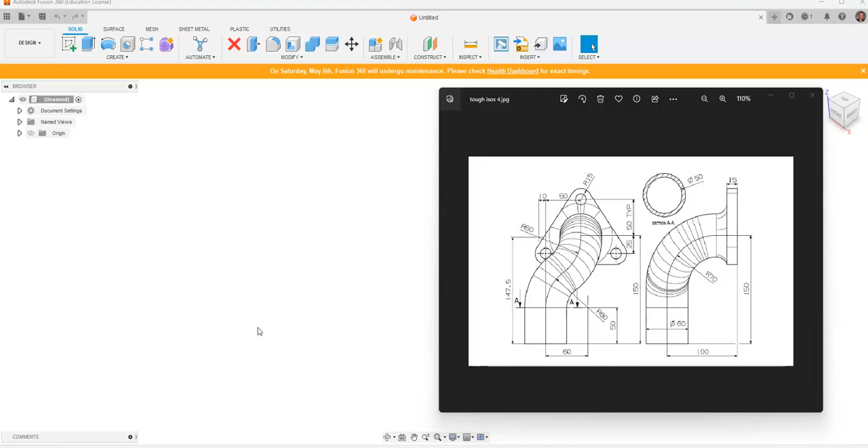For Tough ISOs number 4, we have this bendy, windy tube shape. The surface that we will be sweeping and creating a tube out of is right up here at the top. You have two concentric circles. In our front view, we have a shape that comes up and bends to the right and then bends back left. On the side view, you can see this vertical line that gets a fillet and comes around to the side, and we have this triangular plate that is perfectly 90-degree angle aligned to where our tube becomes at a 90-degree angle here.

Within Fusion, we have two different sketches we're going to do on two different planes, and we'll also be messing and learning with the surface menu within this part creation video.

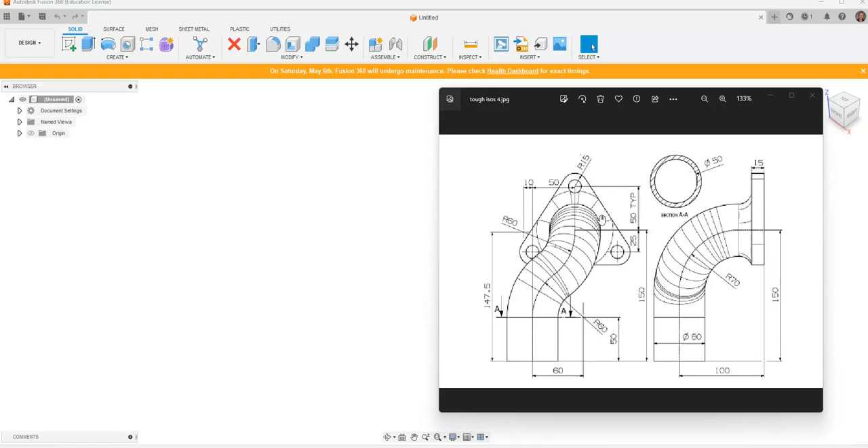So what we'll do is create this object in metric, and for the sake of the video, we're going to create this in millimeters. So we're going to go up to Document Settings, change our unit type to millimeters, and say OK.

I want to take a look at our origin menu. Just turn on the origin here. I'm going to grab a hold of Create Sketch, and we are going to start out on the XZ plane.

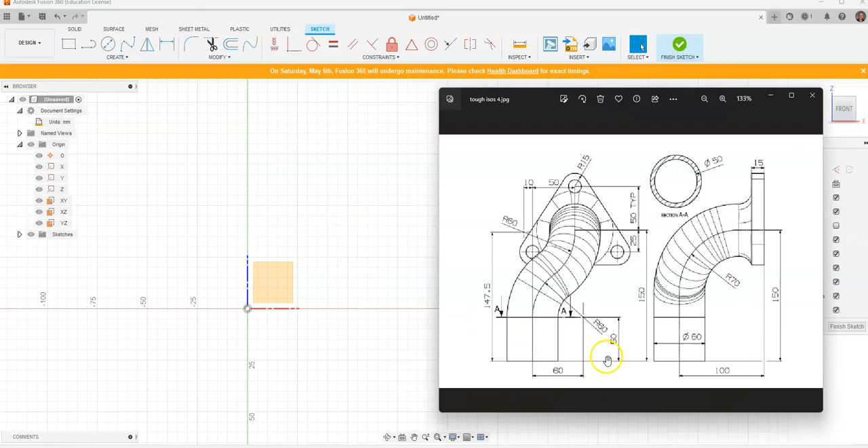To start this sketch, when we take a look at this object, we want to draw a line to start from the origin up a distance of 50. We will be using construction lines in doing this.

So I'm going to go back to our menu, turn on construction, grab a hold of the line command, and I'm going to draw up a distance of 50. I'm going to hit enter.

Now for our next step, we want to try to find this point over here on the right that is the center point of the radius of this curve, and we're going to come over 60 and up 50. So we're going to go up to Create, then down to Point.

Now I just want to place a point over here. I want to grab a hold of Dimension. I'm going to click here, go down, and place a distance of 60. We want to go up a distance of 50 from our point to our origin. We will drag over and put a distance of 50.

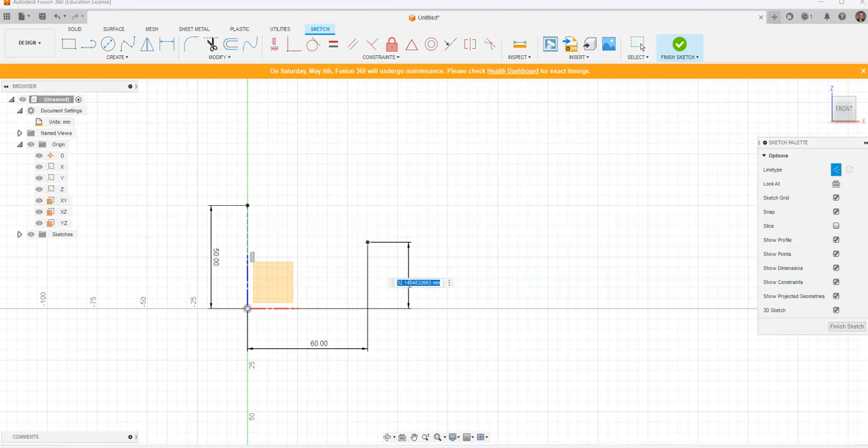If we go back to our object, we will see that we have an arc that is a radius of 60. The diameter then would be 120. We'll go back up to Circle, click on our point, and as we drag out, we'll put a distance of 120. We're going to hit Enter.

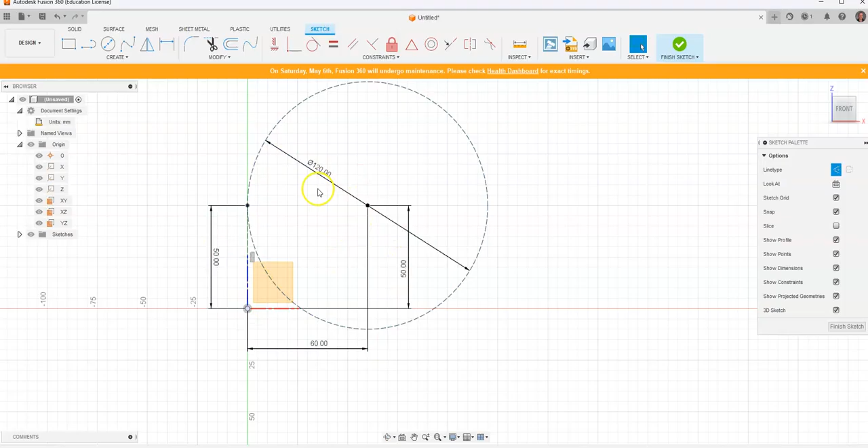Now that creates a perfectly tangent constraint right here, since this is 50 and this is 50. It's very good that we have 60 down here for half the diameter, which creates a nice perfect tangent constraint right in here.

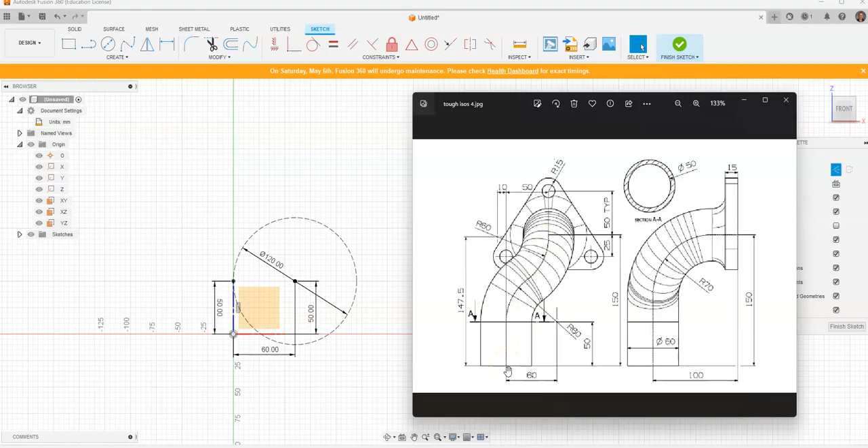Now when we go back and take a look at the object, the next thing we need to do is find the center point for this radius of 60 arc that comes in tangent here. This will allow us to do a little geometric construction, and I want to create a point that starts down here at the origin and is all the way up here at the top, and I can see the height up to here being 150 plus 50.

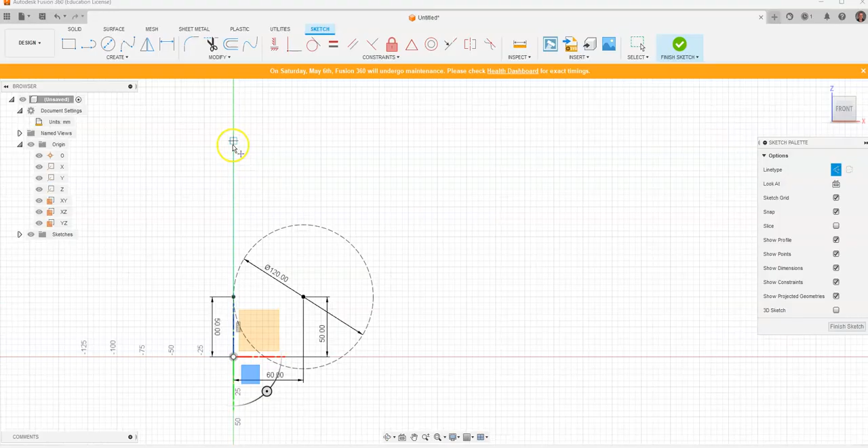So let's grab a hold of the point command, and I'm not going to click when I go to the origin. If you see this little curve down here, I want to get out of 3D Sketch for now. I don't want to click when I go to the origin, but I do want to drag straight up off of it, and you can see that dotted line show up in vertical alignment with the origin. I'm going to click up here, grab a hold of Dimension, and click down here.

I'm going to drag over a distance of 200. I want to make sure I'm not in 3D Sketch again, just to make sure of that. So now that we've gone all the way up here to the top, I'm right up here in this area, and eventually we'll have to create a vertical line that comes straight down tangent here. So I want to come over to the right a distance of 50.

I'm going to go to Create, then Point, and instead of clicking here, I'm going to drag over and have vertical alignment with it, horizontal alignment with it. I want to click on this point, go back to this point, and come up a distance of 50. I'm going to hit Enter.

We also need a point to the left that is 10 from here. I'm going to drag over, Dimension, here to here, 10. Just a nice distance of 10.

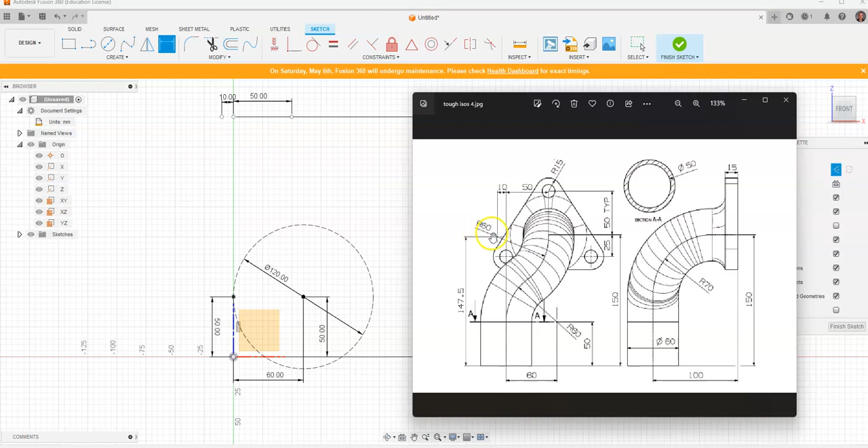10 over to here, and we need a point down from here. Actually, what I need to do is take this one off of here. Let's take this dimension off. One thing I want to do is take this 10 dimension off of here because I placed it over to the side. I'm just going to drag this point down here.

What we need is this point, where I made the mistake, is this dimension right here, and I'll need this point to be 10 over. That's all I really need.

So from here to here, what I can do is say from here to here is a distance of 10. So let's go ahead and put 10 back in down here, and I'm going to go to Dimension again, going from here down to the origin. I'm going to drag over, 147.5.

And hit Enter. We're going to go up to Circle. We're going to go to that point. We're going to put a diameter of 120.

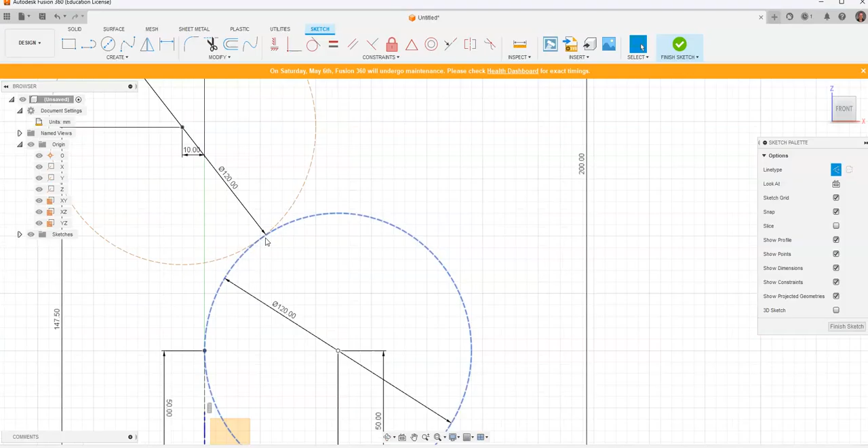Now, one thing I've noticed is that when you create this circle, notice how this stays an orange color and this is a black color. If I zoom in on these two arcs, they do not touch. They're just barely not touching.

So in order to make this work, I'm going to delete away this 120 dimension, and I'm going to grab a hold of the tangent constraint. I'm going to click on these two circles, then our tangent. Now while I'm here, if I click tangent and say this circle be tangent to this line, I'm going to get an error over here because it's trying to say these things are already tangent, which is good.

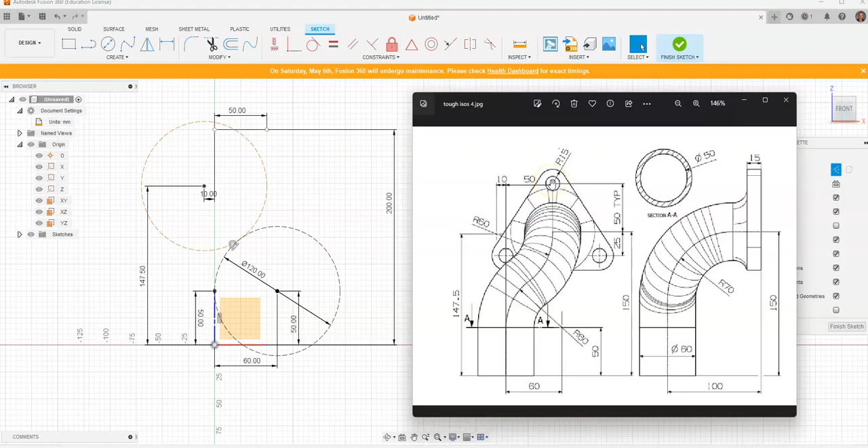Our next step is we want to create a vertical line that goes from the center of this hole straight down. We're going to go to the line command. We're going to start up here at our point. We're going to go straight down.

And if I zoom in, you can see there's a tangent constraint that shows up. Let's click tangent, right click, OK. Trim is what we will do next.

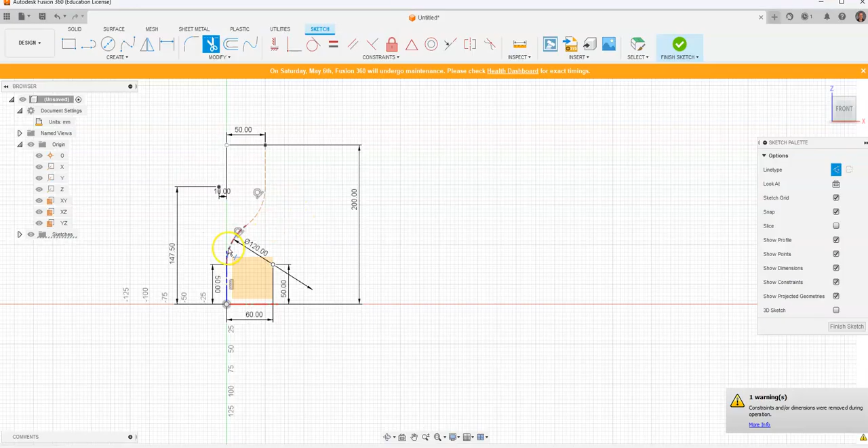I want to trim away the outside here. I'm going to trim away the excess over here on the side. And we now have for ourselves our two curves, a vertical line and a vertical line.

If we look back, if you just look at the hand over here on the picture, we went up, we've created a curve, it's tangent, another curve is tangent. We have ourselves a line that goes straight up.

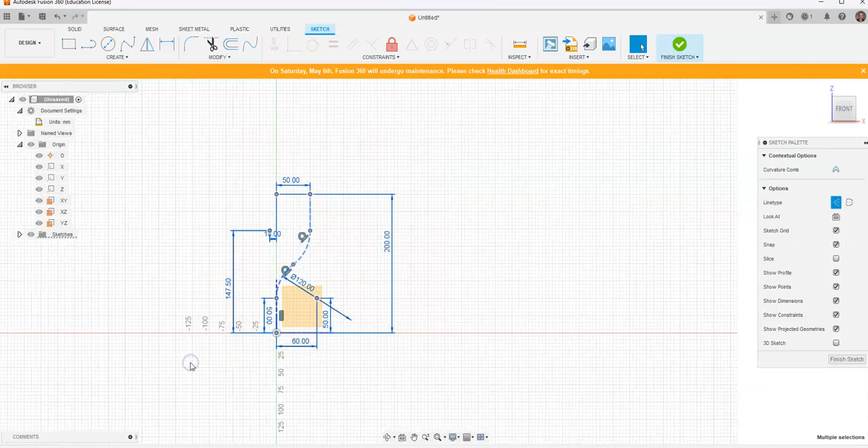When we go back to our sketch menu, I want to highlight all of our construction lines and get rid of construction. These now will be object lines. We're going to go to Finish Sketch. And as we go back, I can see now our lines.

Now, the blue lines right here, what that means is they might not be perfectly formed, but that's not going to be too big of a problem for us later.

Our next step is, from the origin right here, we came over a distance of 50, and you'll see this right here is where that vertical line becomes tangent. What we need is to create for ourselves a work plane that comes over a distance of 50, where we can actually start sketching this arc right here.

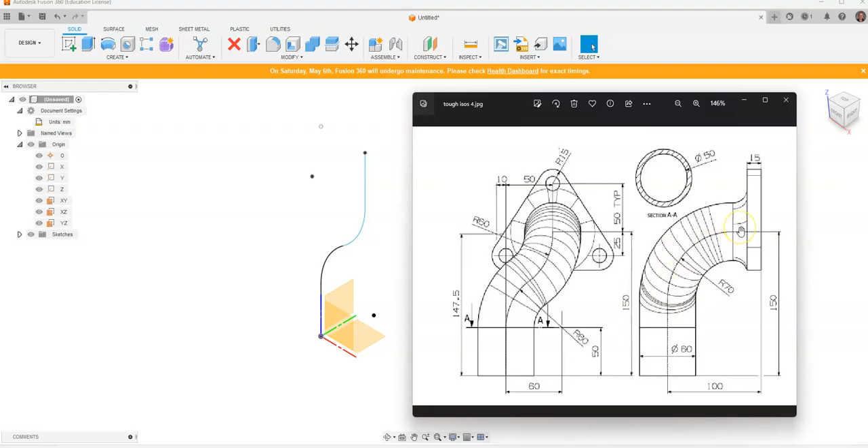You see a vertical line that goes up, you see the arc, you see the horizontal line up here. We need to create for ourselves a new offset plane. So we're going to go up to construct, and we will click on the YZ plane.

We're going to drag over a distance of 50. We're going to create a new sketch on our new plane.

Next we need to find where this point over here is going to be. We see we go over 100 and up 150, but I want to subtract 15 from 100. The horizontal distance we will go over will be 85, and we'll go up a distance of 150.

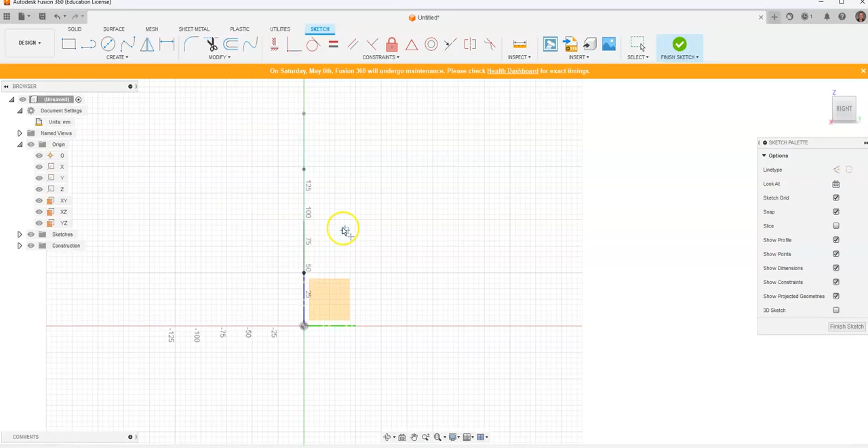So we're going to go down to point again, and I'm just going to click anywhere over here and grab a hold of dimension. From the origin to the point, we're going to go straight over 85 and hit enter.

Let's go back and take a look at our image. We're going to go up a distance of 150 for that point. We're going to go to point, origin, over 150, and enter.

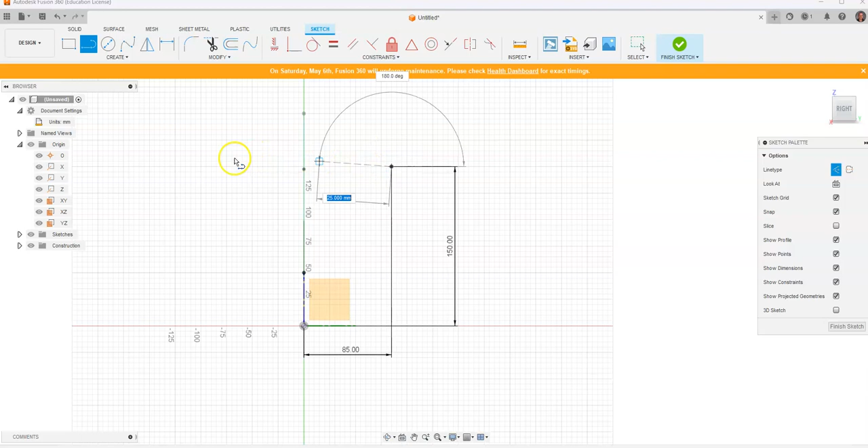I want to go to construction line, and we're going to grab a hold of the line command. We're going to draw for ourselves a line straight over. Doesn't really matter the distance right now, I didn't put in a specific distance.

We're going to go to the line command again, come down here to the bottom. We're going to go straight up.

Now we need an arc that is a radius of 70 right in here. Arc, line, 70. And hit enter. And this right here is exactly what we need.

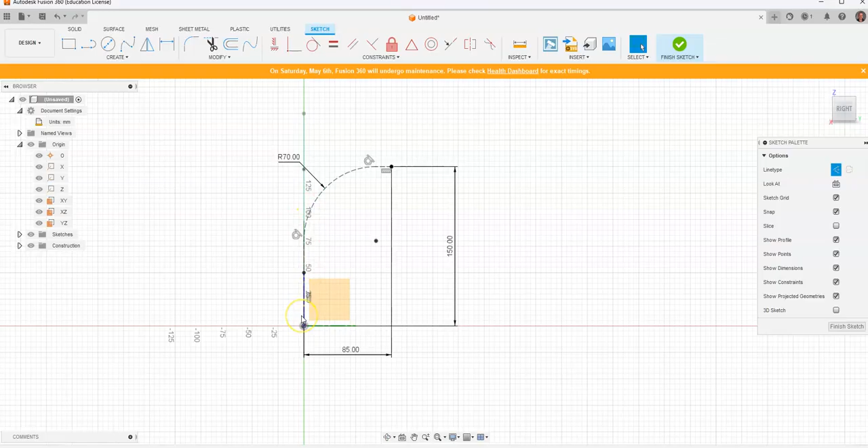We need a vertical line that comes up. We need a tangency here, which we have at this tangent point over here. We have the tangent constraint. It has a radius of 70. It becomes horizontal here, and we have tangent.

So we're going to go ahead and highlight everything and turn it into an object line. Highlight everything, take away construction, finish your sketch, go up to the house command. You'll see now we have for ourselves two different curves on two different planes.

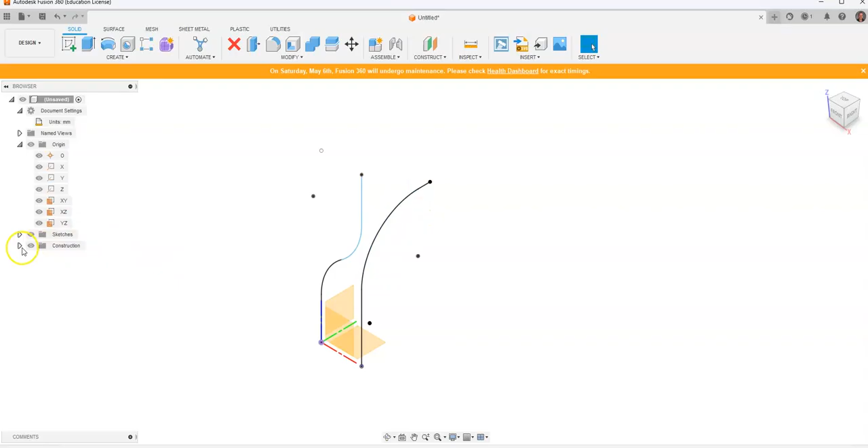This curve is resting on this plane. This curve over here is resting on this offset construction plane that's right here. Now this is where things get a little bit tricky. We're trying to get this curve and this curve to be on a similar plane together.

So this is where we're going to start using the surface menu. And what we'll need is this line right here, just kind of to become a thin surface. There's no profile for us to extrude, there's no closed profile where we can have surface area. We just need this line to become a surface.

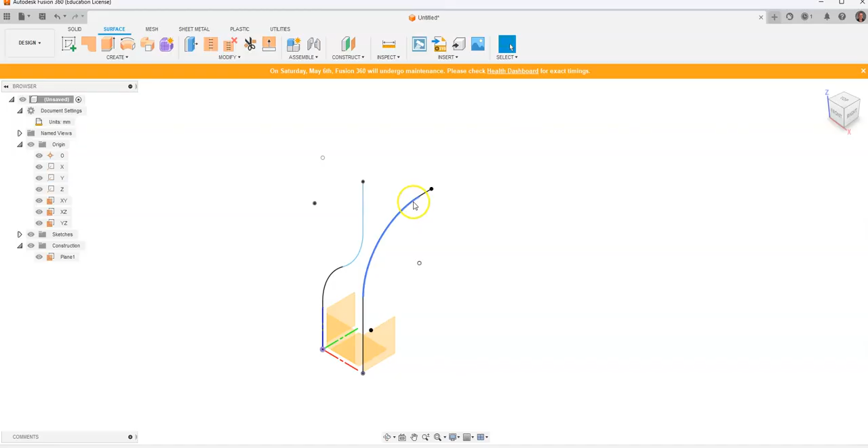And we're going to go up to extrude up here, and we click on this curved line. We're going to go over to direction and go to symmetrical, and I'm just going to drag straight out. Doesn't matter the distance, I just want to drag straight out.

Say OK. Let's go up to create sketch. We want to click on the top flat surface up here and click and go to your house button.

Now we're going to try to project the geometry of this curve here onto this object. Now this is kind of difficult to do in a way because it's not like we have a flat plane. It's not like we're projecting from one flat plane to the same kind of perpendicular, or excuse me, a parallel plane that's just a few feet away from it. This is on a curved surface.

So we need to do a different type of projecting, and in the surface menu you have a different kind of projecting. Let's go down to project. We're going to go to project to surface, and it's going to ask us for faces first. Flat surface, curved surface, other flat surface. We have 3 faces selected.

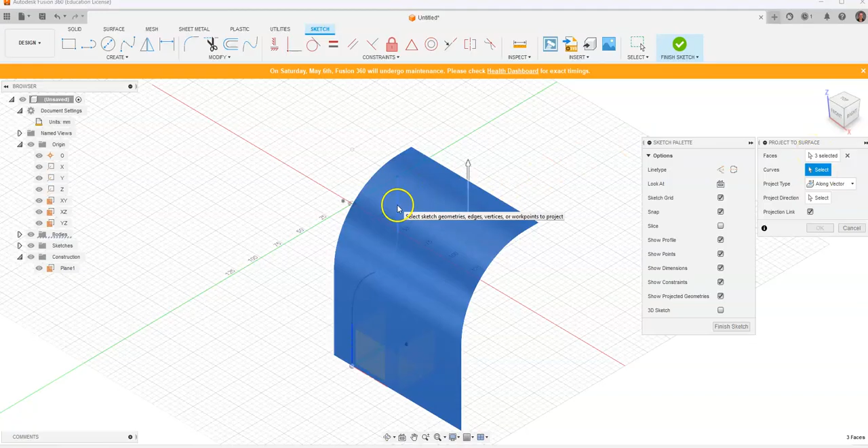We're going to go to curves, and we're going to select every line that we just created. Every line here, there should be 4 separate lines. It'll ask for project type, make sure we're in along vector.

It's going to ask us for project direction. Now if you look up at our view cube, we have Z and we have X. Z is vertical here, X is along the bottom. We need this to go in the Y direction.

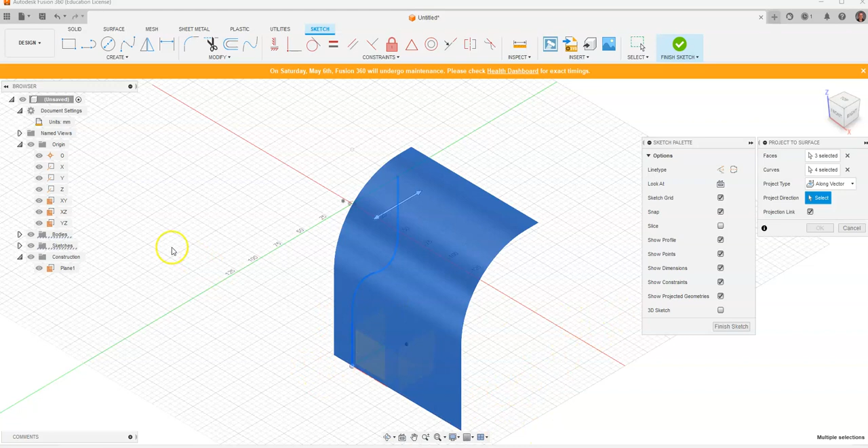So we'll go over to the origin and click on Y. You can see this red curvature is now sitting here. We've taken this curve and projected it onto this plane, laying it onto the plane, kind of like it was a wet piece of spaghetti. We'll go ahead and say OK.

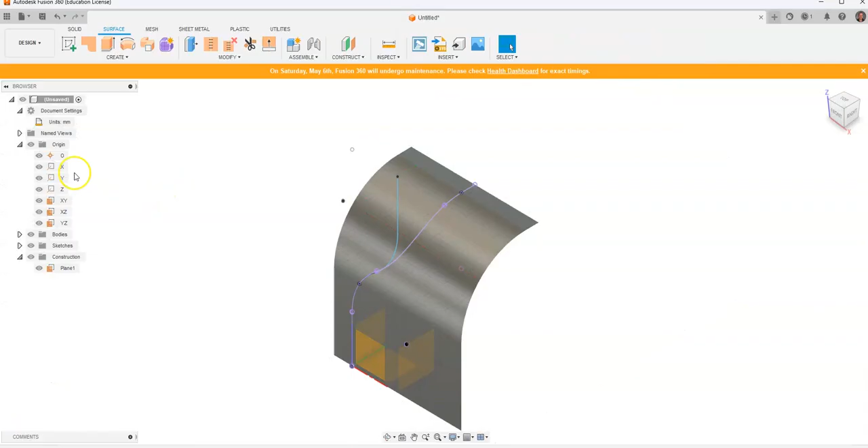You can see we have this purple line here that's now a projected line. We're going to go to Finish Sketch. We'll come over to the Origin menu and turn off the Origin, turn off the visibility of that body, and turn off the visibility of our offset plane.

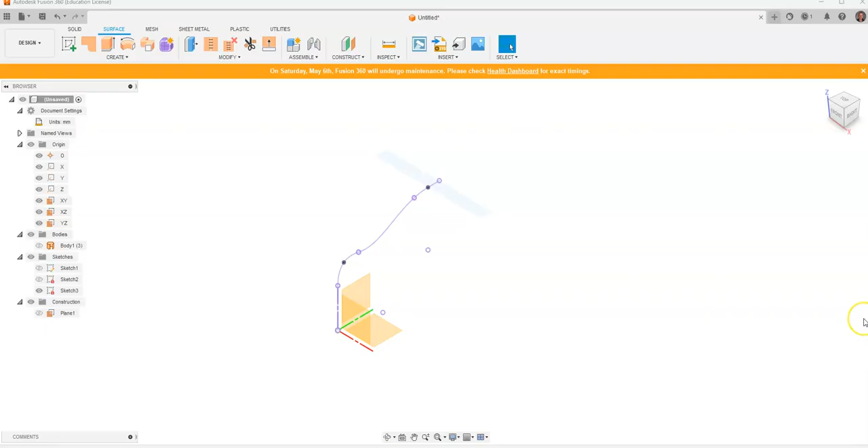We're going to go to Sketches, and the only visible line that I want is just this line right here. Now we can turn back on Origin just to take a look, because we are going to need to sketch our 2 concentric circles, since these 2 circles up here are what's going to follow this path we just created, which we can see in purple.

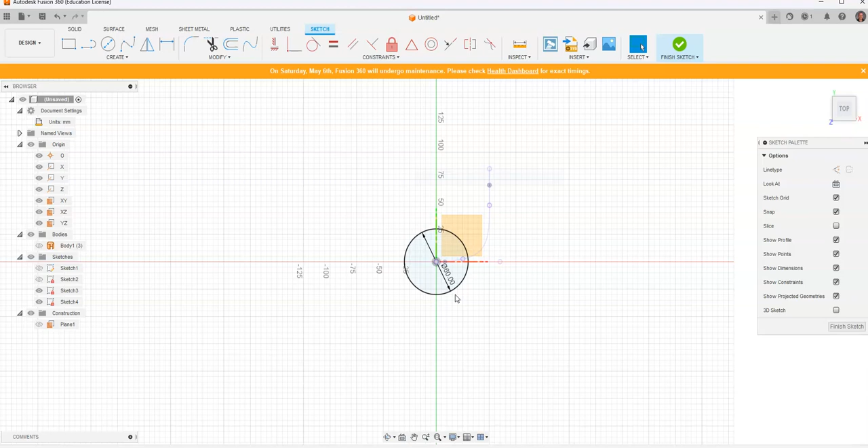So we're going to go back to Solid and go to Create Sketch. Let's click on our XY plane. Let's go up to Create Circle on the Origin, 60, Enter. Let's go back to Circle again, and we'll put a diameter of 50. Say Finish Sketch, and let's turn off the Origin menu.

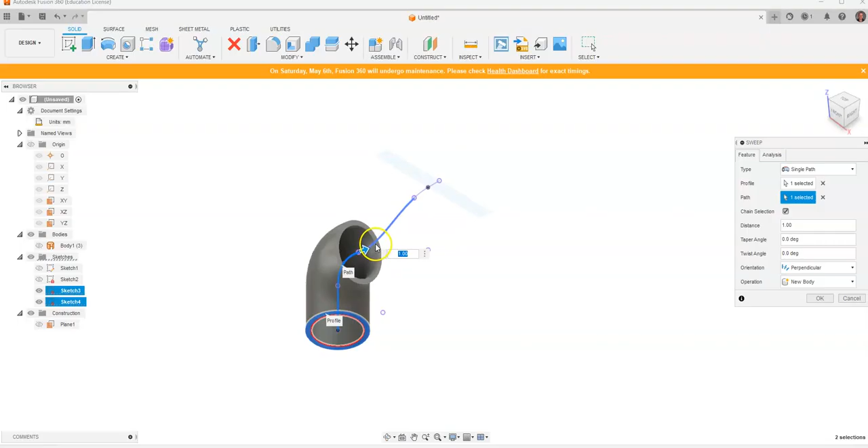We're going to go to Create, Sweep. Click on our 2 concentric circles, and inside the 2 concentric circles here, our path. Notice this is going to be kind of fragmented, so we'll have to click on different paths. Once we get up into this area, it might struggle to get along the whole entire path. Oh, but it did. If by chance it didn't, you can just go create another sweep.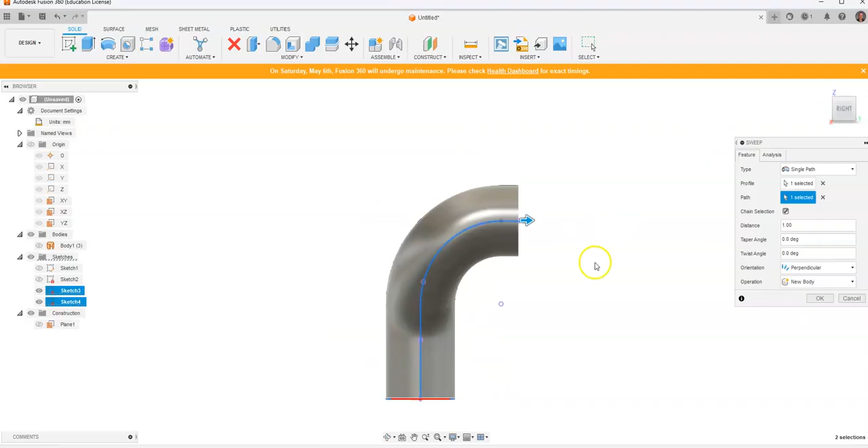So you could have said OK, gone up to Create, gone to Sweep, clicked on this surface, and just clicked on the other 2 parts. Now this perfectly went right up here, a perfect 90-degree angle came up nice and flat. If I say OK, we're going to be out of that part.

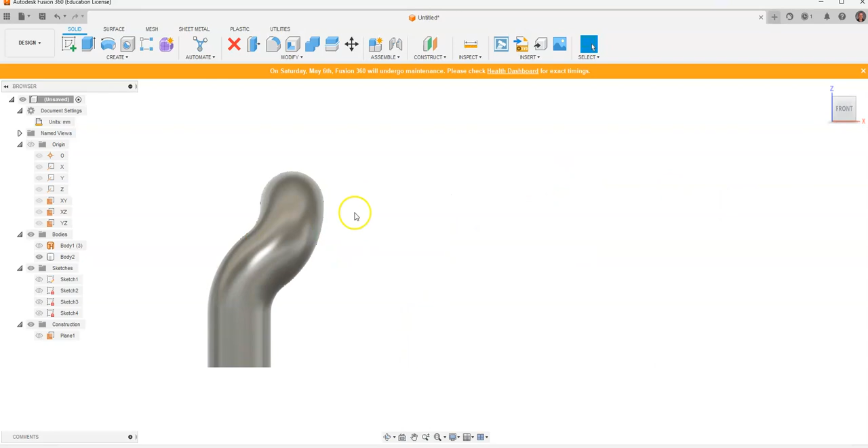Now let's go back and take a look at our object here and take a look at our sketch. We have the perfect curvature that we would see right here. And if I come over to the other side and turn, let's just drag this over real quick - we can see that we have the perfect curvature here. This is pretty complex curvature, staying on this plane and then all of a sudden shifting and going over onto another plane.

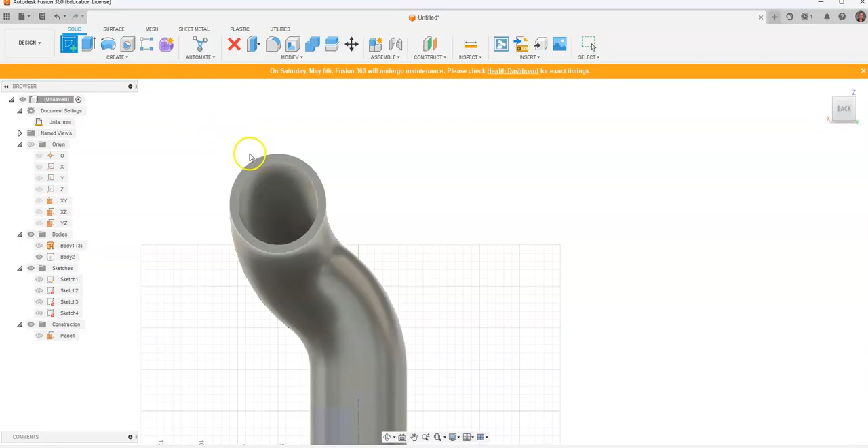Now the next step of creating this object is going to be putting that triangular plate on this surface right here. Let's go up to Create Sketch, let's click on this surface, and we're going to go back to our sketch.

From our center point of our circle, we're going to have to go up 50 here, and down a distance of 25 for the other 2 holes. From the origin here, we go up 50, and here we go down 25 and over 50. So I like to create some points for this.

So we're going to go to Create, and I'm going to go to Point. I want to place a point just up here, and place a point somewhere over here, just close enough for now. Then we can start dimensioning things into place. So from the center of our hole over, I'm going to put in a distance of 50.

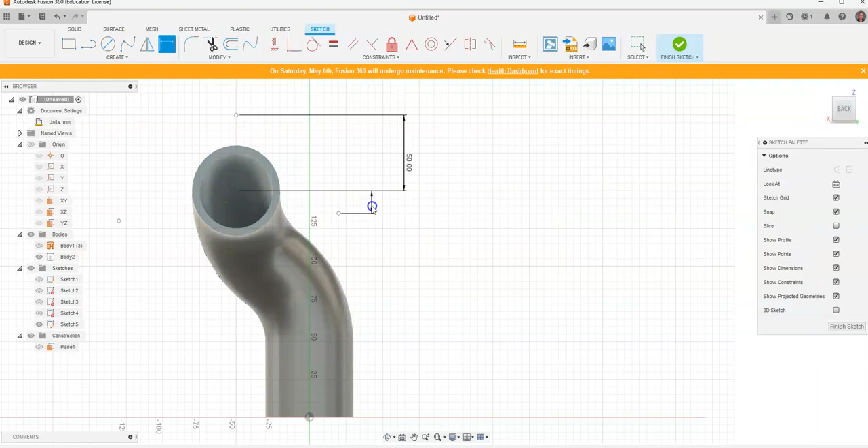Now if I go back to our sketch here, we're going to have to go down 25 from that object and over a distance of 50. So I'm still in dimension from here to here - we're going to go down 25, and from here to here over a distance of 50, and hit Enter.

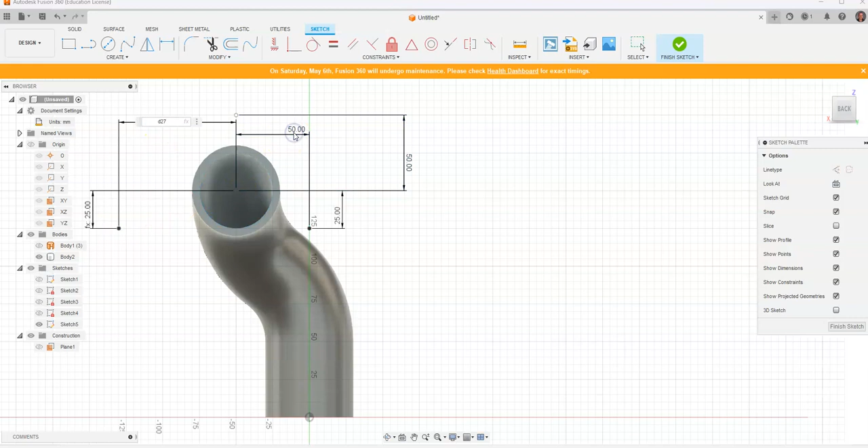Over here again, one thing we can do is just take the dimensions from the other side and click. I'm going to click on my 25 over here, go from here to here, drag up, click on that 50, and hit Enter. Now as we go back, we will see that we have these arcs out here that have a radius of 15.

I'm going to grab a hold of Circle real quick, and we're just going to come out here, and you'll see that I'm in diameter. If the radius is 15, the diameter is 30. Hit Enter, and grab a hold of Circle again.

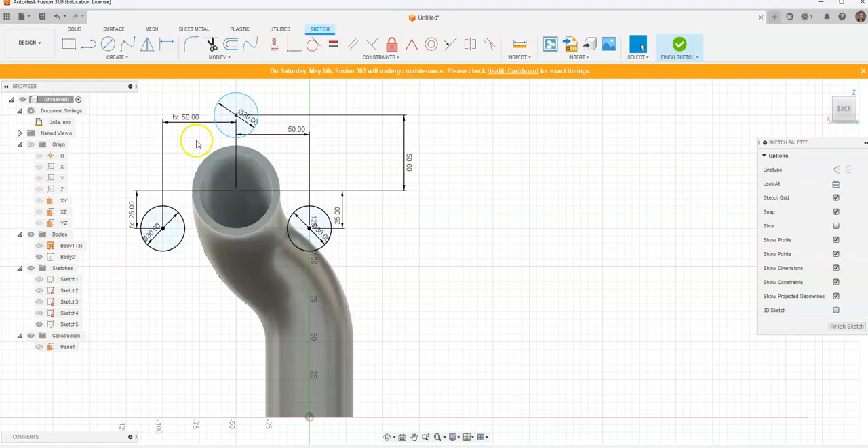I'm just going to come out here, 30. Now as I go through and do this, you might be asking yourself, is there a different way you could have gone about this? Couldn't you have done this, couldn't you have done that? There's more than one way to go about doing these types of things. I encourage you to use what you think is the most efficient process for you. Sometimes when I teach a video, I'm intentionally trying to do things different ways just to get accustomed to them, and just remember that there's different functionalities within Fusion.

I want to click on one of my circles, hold down on the Control key, and select the other 2, and we are going to lock these in place. I don't want them to shift. Locked geometry turns green, I want you to notice that.

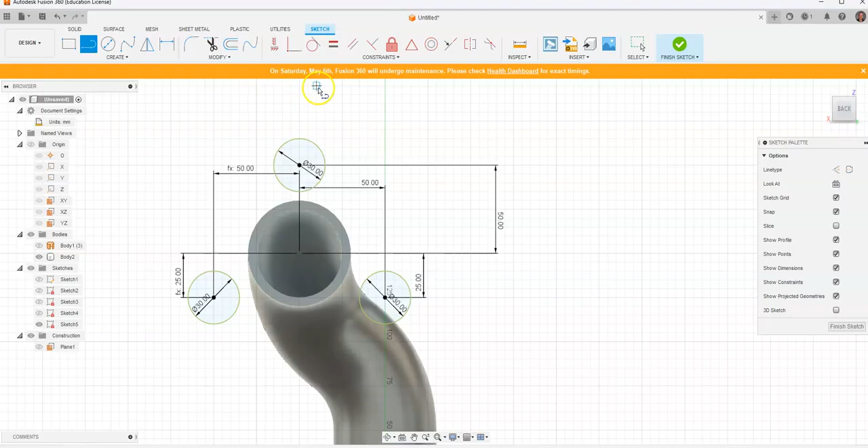So we're going to go up to the line command, and I'm going to click, just drag over here to the side. I'm going to go back into line again. Let's hit escape real quick. I'm going to go back into line, draw another line over here, and draw for myself another line right over here.

We're going to grab a hold of the tangent constraint, and we want these to be tangent to these objects. I'm just going to make this tangent, and go ahead and make this object tangent to each one of these curves.

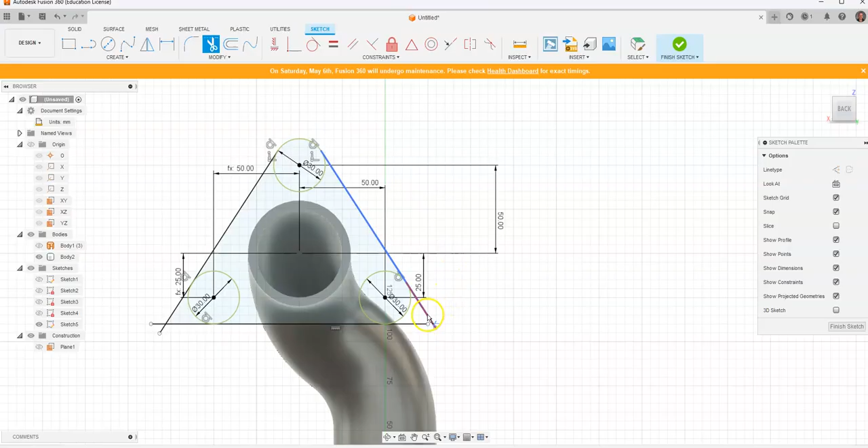Let's grab a hold of the trim command. I want to keep everything. I'm going to trim away everything on the sides of the corners, and once I get through that, I'm going to trim the interior curvature of this object.

Now when we go back, you'll see that we have the outside curvature of the plate. All we really have left to do is just these holes, and I don't see a specific dimension for the holes. The radius here is 15. We're going to say the diameter of the holes is 15, just for the sake of discussion.

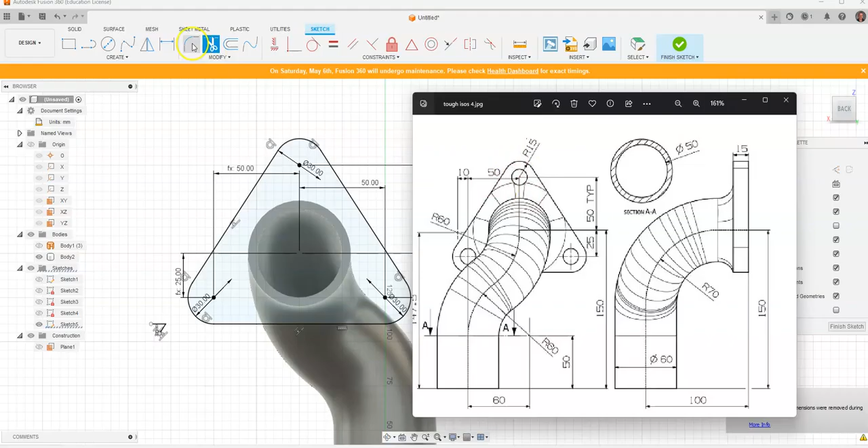So we're going to just click here and go to 15. I'm going to make the diameter of the holes 15. So there we go, 15. Same thing over here, back into circle again, and we'll go to 15. I'm going to hit enter. Go to finish sketch, and see if we can get ourselves a little bit of a turn here on this object.

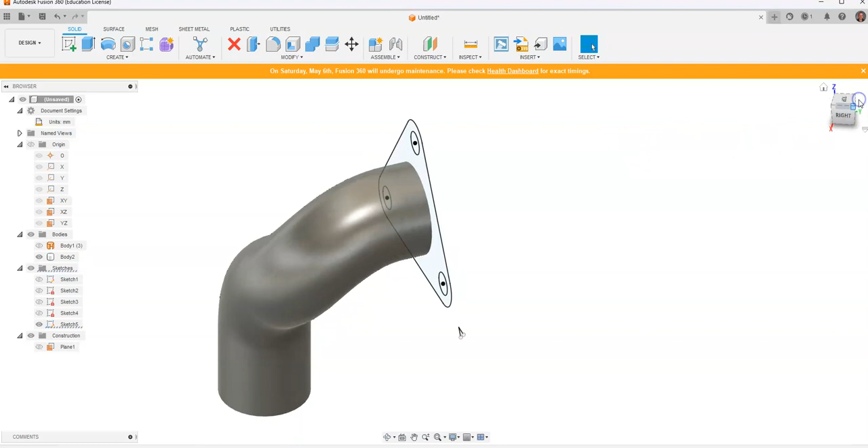Now let's go over to a different isometric view. We're going to go to extrude. Click on extrude, and I also want this surface right in here, I don't want to lose that. The distance out is a distance of 15, and we hit enter.

And we now have pretty much everything we need to show. Let's drag this over here to the side to make sure we can look at everything. You can see we have our curvature right here on the side, and we made our plate here. The only thing we're really missing is a little bit of a fillet back here in the back.

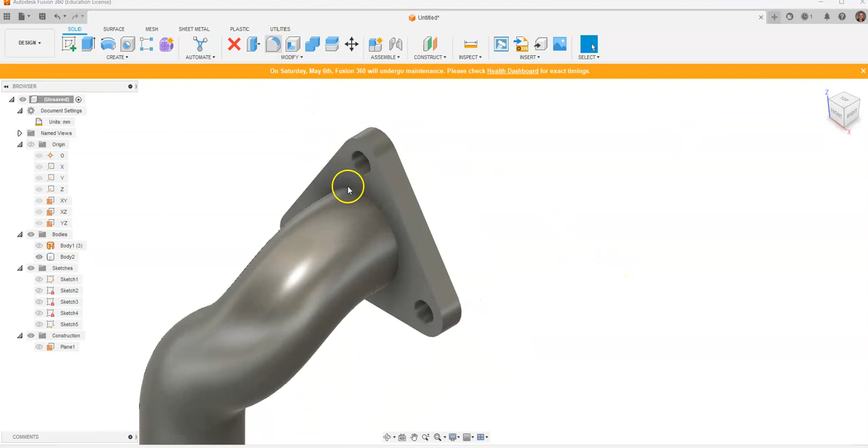So let's curve around here to the back and grab a hold of an additive fillet. We'll go right in here, we'll go to a side view. I'm going to drag this out real quick, see what we can get. Didn't really give us a radius, but I'm going to go close enough in this case. You go around here to the side, see that nice curvature in there.

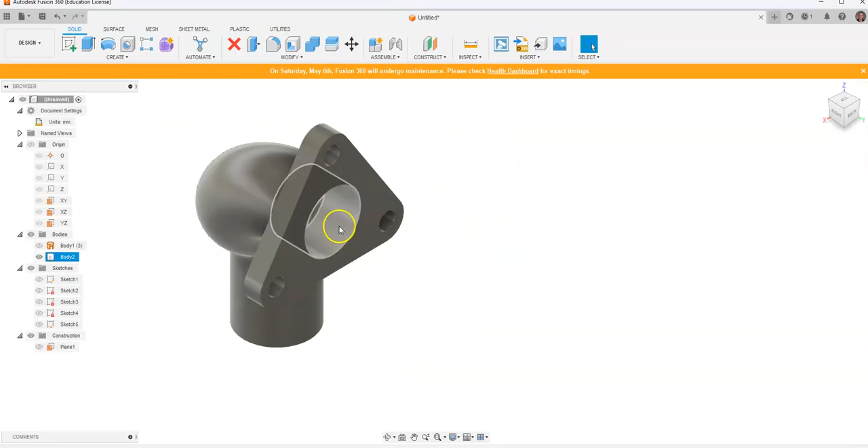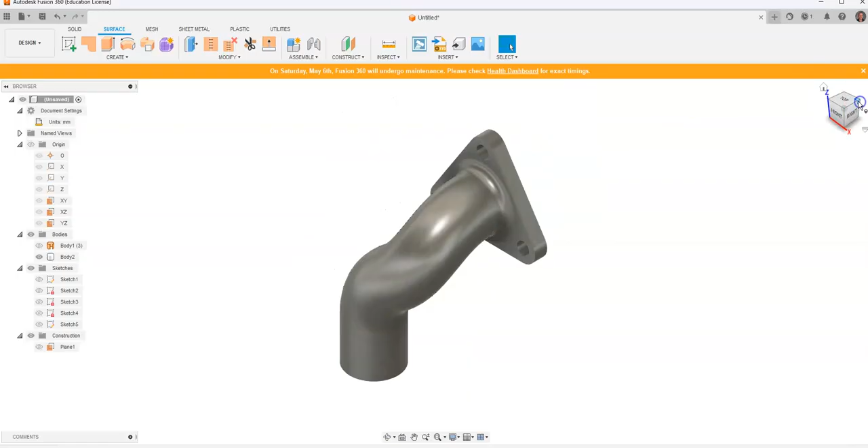And this is us being completed with this Tough ISOs number 4. This is a pretty good case study in complex curvature, and how to use the surface command to create surfaces, project complex curvature onto that surface, and then create a geometry that goes on multiple work planes. So a tough little doozy of a Tough ISO to do, but a great learning opportunity in Fusion for how to go about creating something that has complex curvature on different work planes. So this has been a video for how to go about creating Tough ISOs number 4 in Fusion 360.